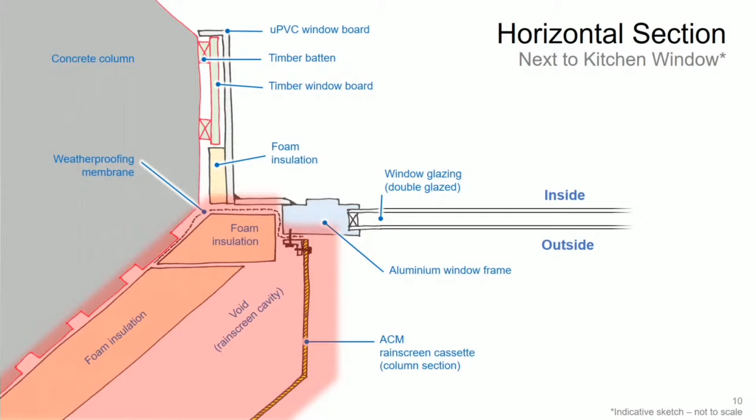In this case, the fire enters the cladding from the rear, but then finds a layer of polymer foam insulation facing a Reynobond PE ACM rain screen with a ventilated cavity in between them. I also developed a sketch through this horizontal section of the kitchen window of flat 16, highlighting this region of the external wall.

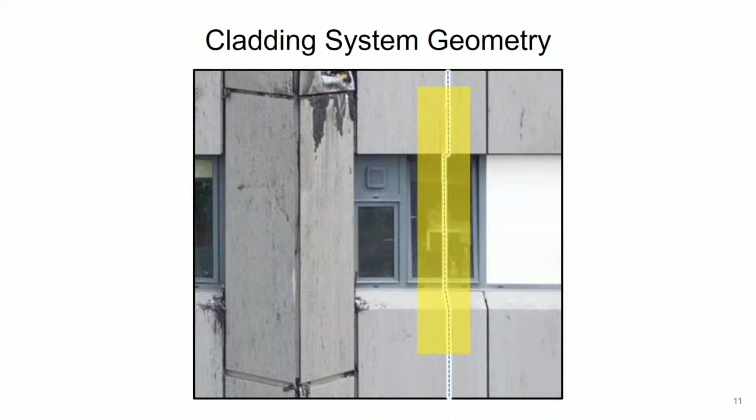Again, as the fire enters the cladding, it finds a layer of polymer foam insulation facing a Reynobond PE ACM rain screen with a ventilated cavity between them. At that time, I was unable to definitively say which of these was the dominant route for fire spread to the cladding. My opinion remains that some combination of these two fire spread routes caused the initial ignition that led to sustained burning and escalation of the cladding fire.

During my phase 1 work for the inquiry, I closely examined the materials and products within the external wall arrangement at Grenfell Tower. I concluded that the available evidence strongly supported a hypothesis that the presence of ACM panels with a polyethylene core material over large areas of the external surface of the tower was the primary cause of upward, downward, and horizontal fire spread.

I observed that the Reynobond PE incorporated a highly combustible polyethylene polymer which melts, drips, and flows whilst burning at elevated temperature. I stated that this polyethylene material should be expected to release large amounts of energy during combustion, to rapidly lose its mechanical properties on heating, and to cause separation of the ACM rain screen panels.

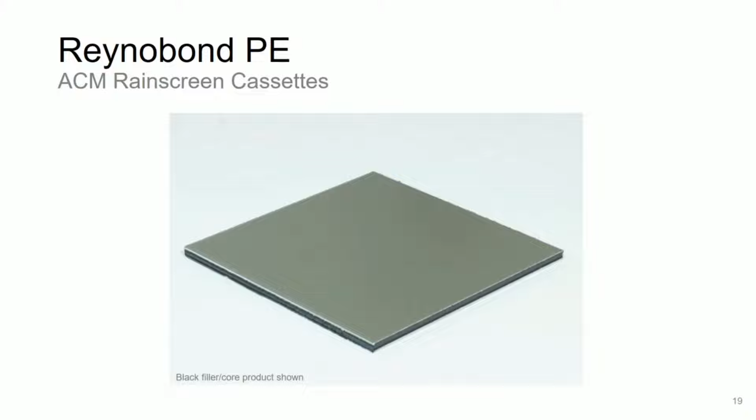Celotex RS5000 insulation board, shown here. I'll refer to this simply as RS5000 throughout this presentation. This product consists of a polyisocyanurate, or PIR, polymer foam core, faced on both sides with a thin, unperforated aluminium foil, which is only a fraction of a millimeter thick. I've performed experiments on both the 80 millimeter thick RS5080 product and the 100 millimeter thick RS5100 product.

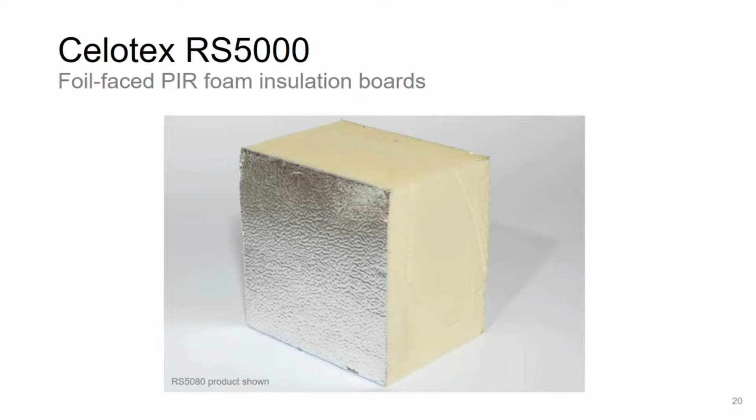Kingspan Kooltherm K15 insulation board, shown here. I will refer to this simply as K15 going forward. This product consists of a phenolic polymer foam core, faced on both sides with a thin aluminium foil, which again is only a fraction of a millimeter thick. The aluminium foil facer in this case has small perforations in it, which if you look very closely at this picture, you can see as small dots on the foil's surface.

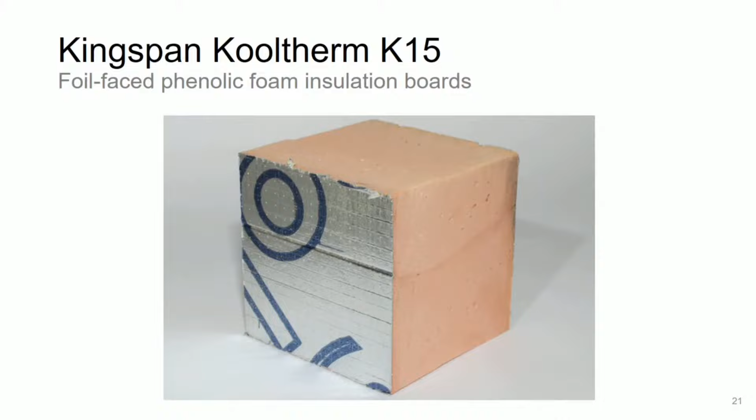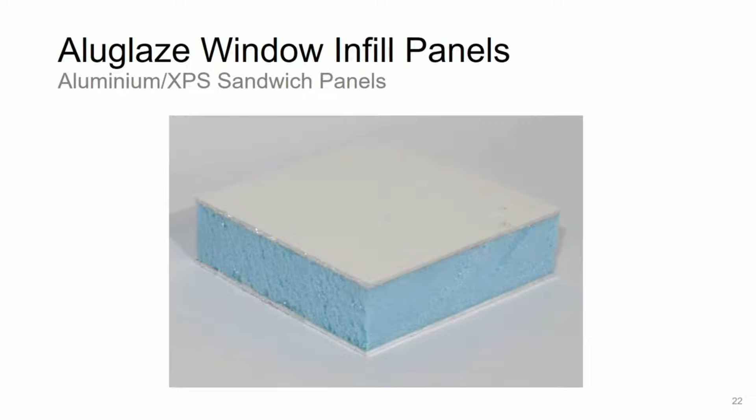And finally, Aluglaze window infill panels, shown here. This product consists of two flat aluminium sheets, each 1.5 millimeters thick, with an extruded polystyrene, or XPS, polymer foam core, which is 25 millimeters thick. So these are the four main products that made up the refurbishment cladding system at Grenfell Tower. Obviously there were other products involved, but these are the four main products that I've considered.

It's worth noting that PIR and phenolic foams are both thermosetting polymers, whereas polyethylene and XPS foam are both thermoplastic polymers. I've discussed those issues before, and I'll demonstrate the key differences between these two classes of polymers during my presentation today.

I've provided more detailed descriptions of all four of these products in my Phase 2 reports, so I'm going to avoid any further description here, as we've been talking about them for many years now.

In my first presentation to the inquiry, and indeed this morning, Professor Torero also covered a lot of this ground. I described some fundamental fire science concepts and terminology, including detailed discussions of pyrolysis, thermal inertia, flammability, ignition, heat of combustion, heat release rate, and flame spread. Those are all centrally important concepts, as Professor Torero illustrated this morning. I'm not going to rehearse those concepts again today, but the concepts I covered during my 2018 presentation are all immediately relevant to what I will present today.

I believe the most useful and illustrative way for me to present the outcomes of my experiments to individuals who are not fire safety specialists, and who may not have a deep technical understanding of all the terminology I've just listed, is by walking through videos of selected experiments and describing my observations as we go. I'll do quite a lot of that today, starting in a few minutes.

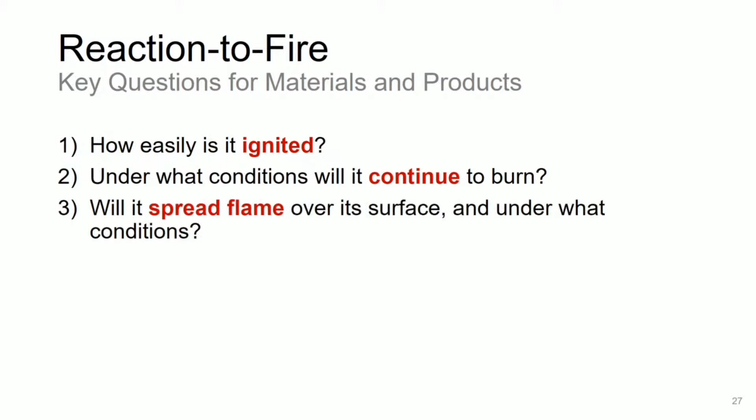When we think about the reaction to fire of a material or product, we need to consider a range of interrelated questions. How easily is it ignited? Under what conditions will it continue to burn once ignited? Will it spread flame over its surface, and under what conditions? How much energy, i.e. heat, is released when it burns under the conditions of interest? And at what rate is that energy released?

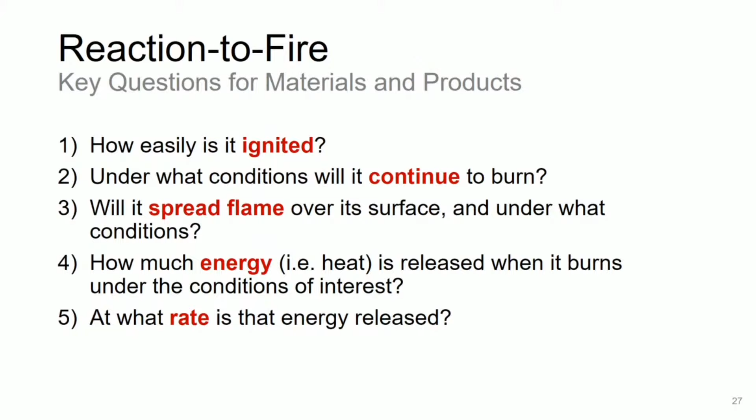Answers to any one of these questions in isolation cannot tell the whole story of the fire hazards presented by a material or product. This is why I routinely use the word hazardous as a catch-all term describing hazardous with respect to fire. None of the other descriptors - combustible, flammable, ignitable, etc. - adequately describe fire hazard on their own. This is also why my Work Package 1 report, and indeed my other experimental reports, contain results from a number of experiments conducted at various scales and under a wide range of heating conditions.

So first, I'd like to consider the heats of combustion of the polymer core materials from my four products of primary interest.

As I explained in my 2018 presentation to the inquiry, the heat of combustion of a material is a measure of the total energy that can be released per unit mass of the material when burning under optimal conditions for combustion. The heat of combustion thus provides an upper limit on the amount of energy that could be released by the burning of a material. You'll hopefully have noticed I'm using the word 'material' deliberately in this context rather than 'product'. Products do not have heats of combustion, unless a product is made entirely of one material. That's why I'm using that terminology - only materials have heats of combustion.

This slide shows a comparison of the heats of combustion measured for polymer core materials from each of the four products of interest. They were measured using a bomb calorimeter, and it's clear that the polyethylene core material from the Reynobond PE, the leftmost bar, has the highest heat of combustion, comparable to diesel fuel, as has been mentioned numerous times throughout the inquiry, and that the phenolic foam from the K15 product has the lowest of the products I'm showing here. However, it's important to recognize these values are given on a per unit mass of the core material basis, rather than a per unit area of the product that incorporates it.

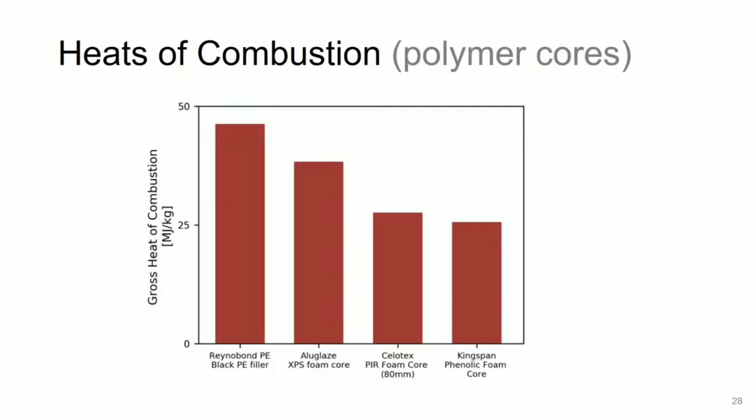If I multiply these heats of combustion by the densities of the respective core materials and then by the thicknesses of core material within each product, I get the maximum possible energy contribution per unit area of each product, which is actually a more useful metric - i.e. the maximum energy that could be released if the product were to burn under optimum conditions.

This comparison is shown here. We can see that on this basis, the story changes, because it's not simply a question of how much energy is in the material per unit mass, but also how much mass of material is present within the product. By this comparison, we can see that the maximum amount of available energy per unit area becomes more comparable between the Reynobond and the polymer foam insulations, and that the Aluglaze window infill panels appear to be less significant.

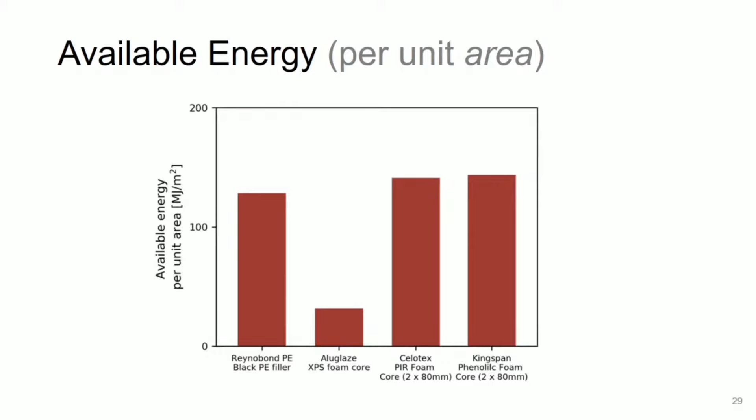But we then need to ask another question: how much of each product, in terms of square meters of surface area, was present on Grenfell Tower before the fire? Based on the design drawings for the external wall arrangements, I've calculated the total surface area of each product on a typical single story of Grenfell Tower, as shown by this highlighted area.

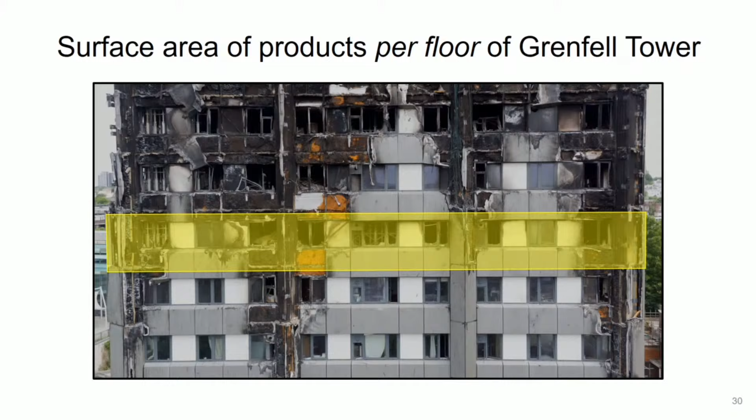We then end up with an approximation of the maximum possible energy contribution from each of the 4 main cladding products that were actually installed on Grenfell Tower. Here, I'm assuming as a worst case scenario that all 4 products burn entirely, and that this burning occurs under optimal conditions for combustion, which is actually not a fair comparison, I should say.

Here we can see the result of this calculation for a single story of Grenfell Tower, if we assume that only Celotex RS5000 insulation was present, i.e. there was no Kingspan present, and it was all the Celotex product. But we would see an almost identical story if we assume that only Kingspan K15 was present, and I've outlined that graph in my Work Package 1 report.

In any case, this plot shows that the maximum potential energy contribution from the Aluglaze window infill panels is small when compared with the Reynobond PE or the polymer foam insulations. And for this reason, I'll not discuss Aluglaze window infill panels much more within this presentation.

However, my Work Package 1 report does contain results of experiments on Aluglaze window infill panels, and I do consider that these are relevant to cladding fire safety issues, particularly for other buildings whose exterior walls and window sets may contain similarly hazardous products. Now, of course, the comparison in this plot is only fair if we assume that all of the energy available within each of these products is actually released during a fire.

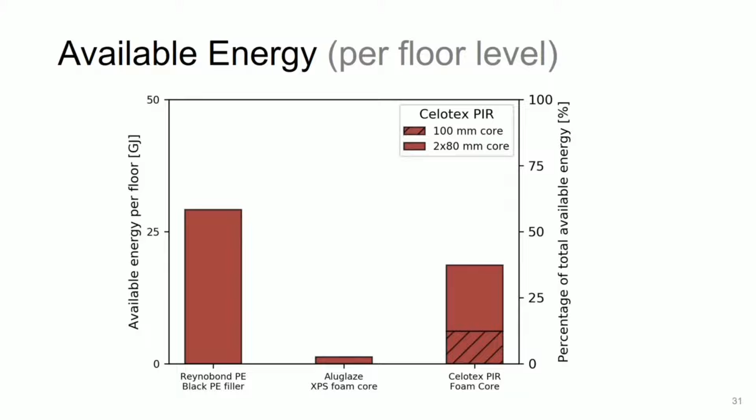And this is extremely unlikely in a real fire, both because the combustion environment in a real fire is not optimal, and because of the differing physical responses of the polymer core materials that are involved.

The thermoplastic core materials in Reynobond PE ACM and in Aluglaze window infill panels will melt and drip, whereas the thermosetting polymer core materials of RS5000 and K15 will char. They do not melt and drip. I'll show you how these differences affect the respective products' burning behaviors later on in this presentation.

In any case, the maximum potential energy contributions on their own don't provide any information regarding the rate at which energy would be released after a product is ignited, or indeed the total amount of energy that would actually be released in a real fire. Nor do the preceding comparisons account for the heat transfer processes that lead to ignition, the material geometry, or the physical changes that may occur, all of which will also affect a product's burning behavior.

To illustrate and understand these other factors, we have to perform other types of experiments.

For my Work Package 1 experiments, we designed and built a bespoke experimental apparatus. This was designed to investigate the mechanical behaviors of the products when subjected to a range of heating conditions, their characteristic burning behaviors, the impacts of sample scale and localized heating, the impacts of fixing and support conditions, and to establish the heat flux causing ignition of the various products of interest when tested under specific conditions of heating and fixing.

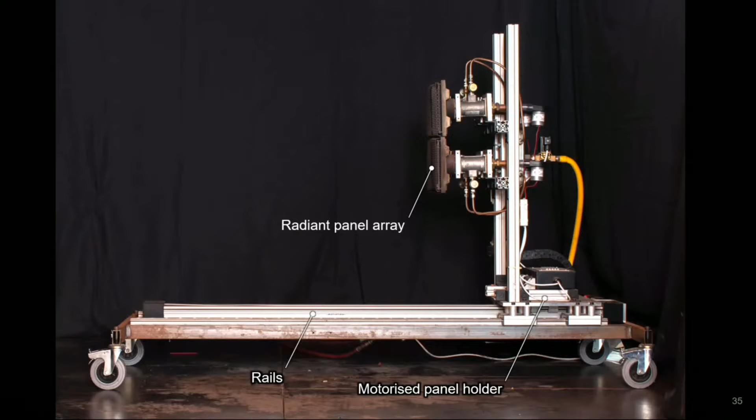Now, this photo shows the heater that we used in our experiments. It consists of an array of radiant panels that are fueled by a precisely controlled flow of propane gas mixed with air. The radiant panel array was mounted onto a motorized actuator, which allowed the distance between the panels and the samples to be varied, as I'll show you in a moment. So it moved in that direction.

This allowed us to control the severity of heating, which we call the heat flux, as Professor Torero explained this morning, measured in units of kilowatts per meter squared - units of energy per time per unit area. To give you a sense of scale, this rig that I'm showing here is about 1 meter tall.

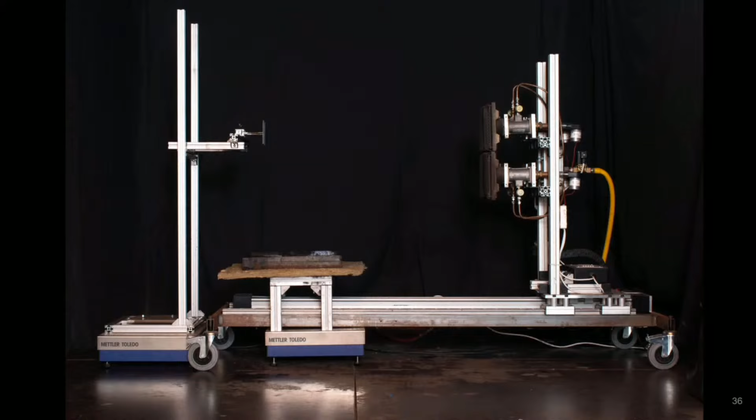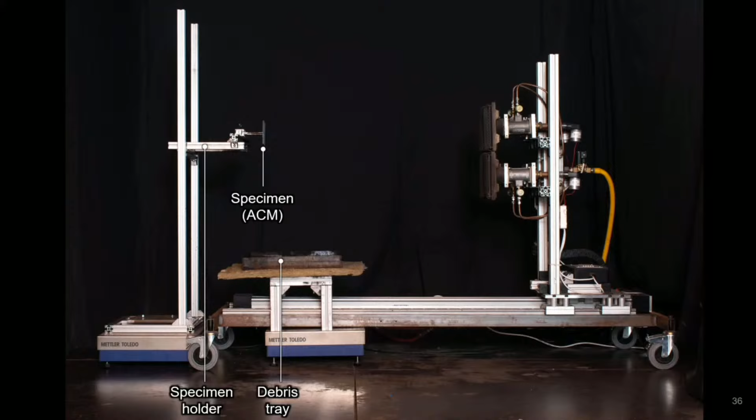Experimental specimens were mounted onto a specimen holder and held above a tray used to catch any falling debris. Both the specimen holder and the debris tray were placed on balances, essentially digital scales, to measure the masses lost or gained by the products throughout the experiment, or mass gained by the debris tray.

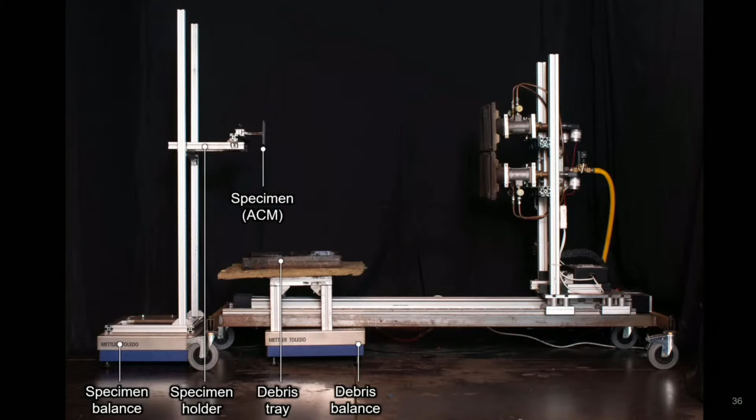The experimental arrangement also included other features aimed at improving consistency and repeatability of our experiments, including a pilot flame, a heat shield, and a movable heat flux gauge. These are all shown here and are described within my Work Package 1 report.

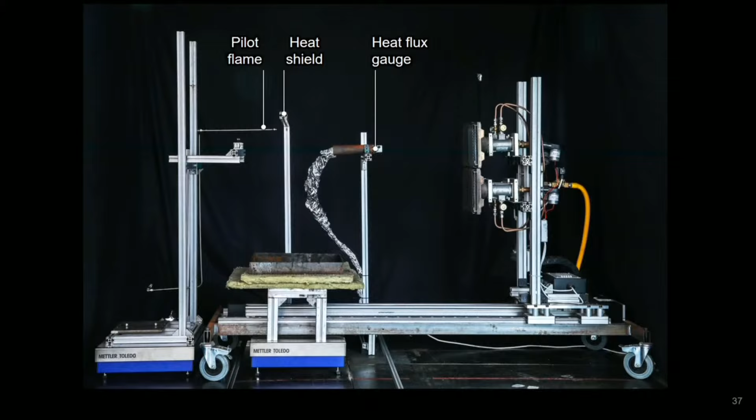The experimental specimens were square, flat samples of the respective products of interest with exposed edges of core materials, either 100 millimeter square or 500 millimeter square. Reynobond PE samples were tested in 3 different configurations, namely a rear fixing condition, with the sample supported from its rear aluminium skin, allowing for downward mobility of the front face of the sample on heating, as will become clear when I show you some of these experiments.

We also used a front fixing condition, with the sample supported from its front aluminium facer, thus allowing for downward mobility of the rear face of the sample on heating.

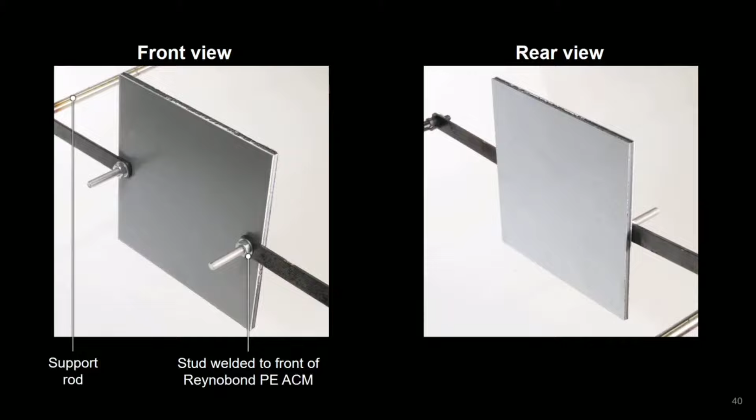Finally, a through fixing condition was also used, with the samples drilled through and supported from both their aluminium skins, the front face and the rear face, thus preventing downward mobility of either of the aluminium skins and also restricting to some extent their mechanical separation on heating.

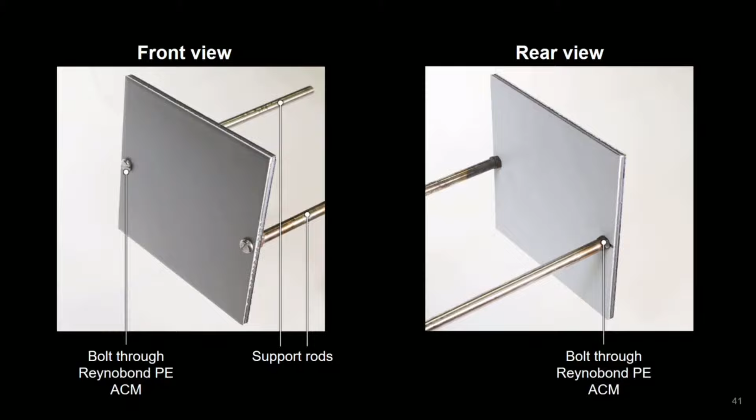These 3 fixing conditions were chosen to shed light on some of the observed differences in the performance of ACM products when exposed to fire in either riveted or cassette configurations, which I've discussed in detail in my Work Package 1 report. For instance, to better understand why ACM PE products tend to perform better in single burning item tests when tested in a riveted rather than a cassette configuration.

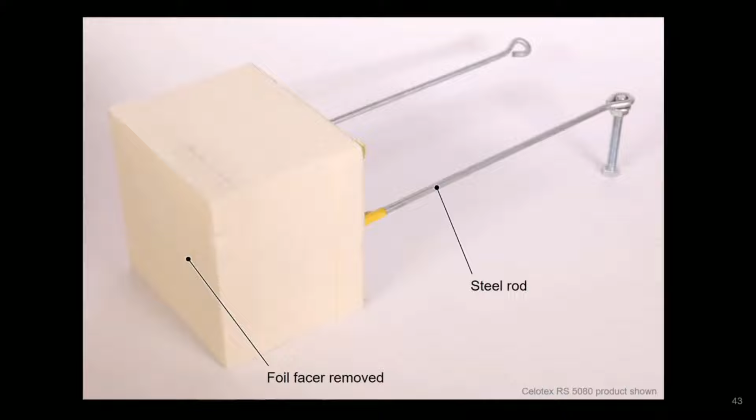Insulation product specimens in our experiments for Work Package 1 were held in place using 2 steel rods inserted into the rear face of the samples. In some cases, the foil facer on the exposed face of the sample was removed prior to the experiment. We did experiments both with and without foil.

This was done because during phase 1, I had identified locations within the cladding system where cut edges of insulation products were left exposed within cavities in the cladding system at Grenfell Tower.

A large number of measurements were recorded throughout these experiments. These included multiple videos framed from different vantage points, the masses of the specimen and any debris falling into the tray beneath the specimen, the heat release rate, or HRR as we refer to it, measured using a technique called oxygen consumption calorimetry, which I won't go into today, and temperatures recorded using thermocouples.

In a few minutes, I'll show you some videos of typical experiments performed using my Work Package 1 experimental apparatus, as I've described it here. I hope that when I show you these videos, this will all become a bit clearer, as I understand it's probably a bit difficult to get your head around what I'm talking about at the moment. So now let's turn to some of my main experimental results.

Before a product can burn with a flame, it needs to ignite. Ignition is simply the initiation of sustained flaming. Whether ignition of a solid material occurs depends both on the severity of heating, which we call the heat flux, and the duration of heating. In my 2018 presentation to the inquiry, I also explained that flame spread can be thought of as a series of ignitions.

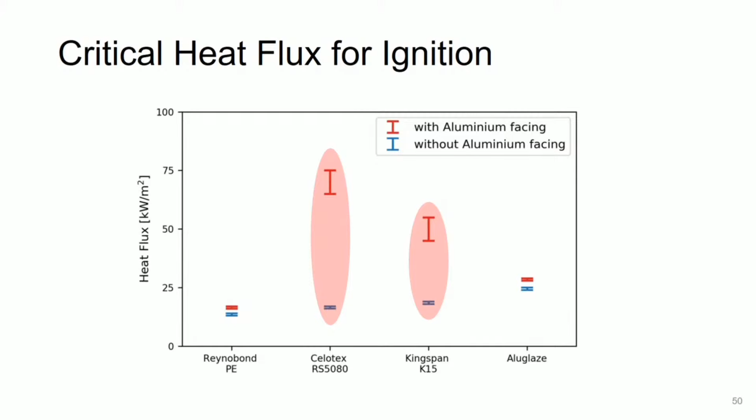Professor, I'm going to interrupt you for a second. I think the stenographer is finding it quite difficult to keep up with you, so if you could slow down a little bit, I think she'd find it easier. I will certainly try. Do you mind? I'm sorry, yes, apologies.

Okay, yes. So the beneficial effect of the foil facers is less pronounced for the Kingspan Cooltherm K15 insulation. I consider it likely that this is at least partly due to the presence of perforations in the K15 foil facers that are not present for the RS5080.

I should also say here that I consider that the presence of perforations in the foil facers of a polymer foam insulation should, self-evidently, be expected to influence -- by which I mean worsen -- its reaction to fire behavior.

I should also note that this plot fails to tell the whole story, because whilst it tells us what severity of heating will lead to piloted ignition eventually, it doesn't tell us how rapidly this ignition will occur at a given heat flux.

In general terms, all other factors being equal, it takes considerably longer to ignite the polyethylene core of an ACM product than it does to ignite the polymer foam insulation without a foil facer. We're talking minutes for the ACM versus seconds for the polymer foam insulation when we take the foil away.

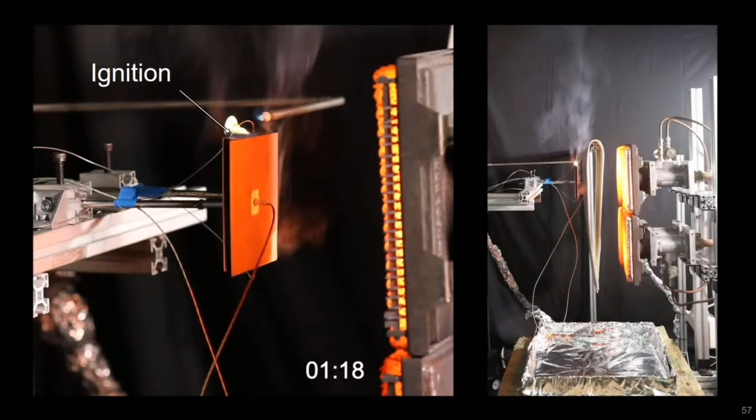At 1 minute and 18 seconds, we'll see ignition occur at the top of the sample. There it is. A few seconds later, at 1 minute and 22 seconds, the front facer of aluminium falls away from the sample and lands in the debris tray, and you can see that it's now flaming in the debris tray. The back face of the aluminium remains in place, held on the sample holder, and the majority of the polyethylene core material remains attached to that face of the sample.

Flaming then continues on the front aluminium facer, now in the debris tray, and discontinuous flames become visible over the front surface of the specimen. You can see here we've switched to a low exposure view on the left-hand side so that we can see things as the flames grow.

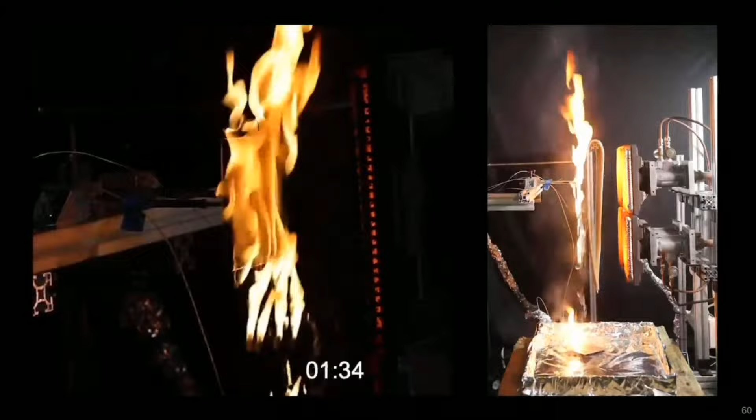By 1 minute and 30 seconds, flaming is well established over the front surface of the exposed polyethylene, and the first burning droplets of polyethylene begin to fall from the base of the specimen into the debris tray. The rate of droplet production increases quite rapidly, and a continuous stream of burning polyethylene falls into the debris tray and increases the size of the pool fire.

It's probably also worth having a look at the left-hand image, just the way the polyethylene is melting and flowing and dripping, which you can sort of make out through the flames.

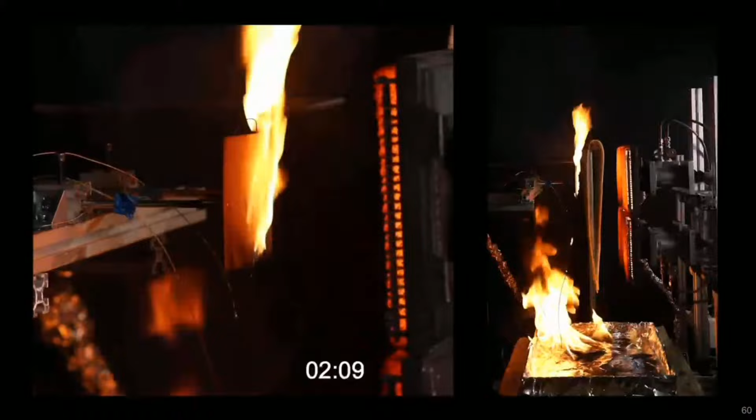At 2 minutes and 9 seconds, dripping ceases, and flaming on the specimen then also ceases shortly thereafter. Between 2 minutes 9 seconds and 4 minutes 48 seconds, we're running at 10 times speed. The length of the flames from the polyethylene, still burning in the debris tray, gradually decreases until extinction occurs. The experiment is then terminated.

I hope we can agree that looked like quite a lot of fire from actually quite a small piece of material. It's perhaps a bit tricky to visualize a 100 by 100 millimeter square sample of Reynobond PE, so I've brought a sample with me. To put it into perspective, this was the piece of Reynobond that we tested in that video, and that's about the size of a beer mat or a drinks coaster. So it's a piece like that - not very much material at all.

If you run the numbers, which I've done, you'd find that a typical single-story column cassette from Grenfell Tower, so a single panel of Reynobond PE taken from the tower from one of the column sections, would contain about 270 of these in a single column cassette.

Now let's take a look at some of the resulting data from this experiment. I'm going to focus on the data from this specific experiment and then provide you some general conclusions and data afterwards. I mentioned previously that during these experiments we measured the heat release rate due to burning. I don't want to intimidate anyone with over-technical language or data, but I do think it's important for transparency, if nothing else, for me to show you the kinds of data that I've considered in performing my analyses and drawing my conclusions.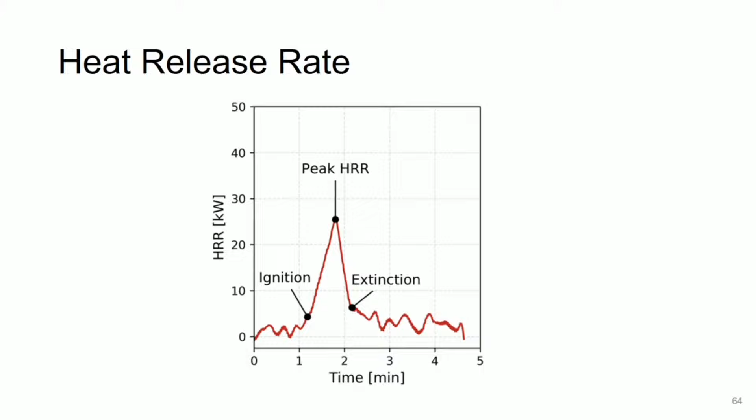If we calculate the area underneath this heat release rate curve, we can obtain an estimate of the total amount of energy that was liberated as that sample burned. Similar plots were developed and compared for all of the Work Package 1 experiments that we performed.

During our experiments, we also continuously monitored the amount of mass lost from the experimental sample and the amount of mass gained by the debris tray situated below the sample. These data are shown here, mass lost on the left-hand side and mass gained on the right-hand side. By comparing the mass of the sample with the visual observations, we observed a sudden decrease in the sample mass at 1 minute and 22 seconds, and this occurred when the front plate of aluminium fell from the specimen. The recorded decrease of sample mass corresponds with the expected mass of the aluminium facer plate.

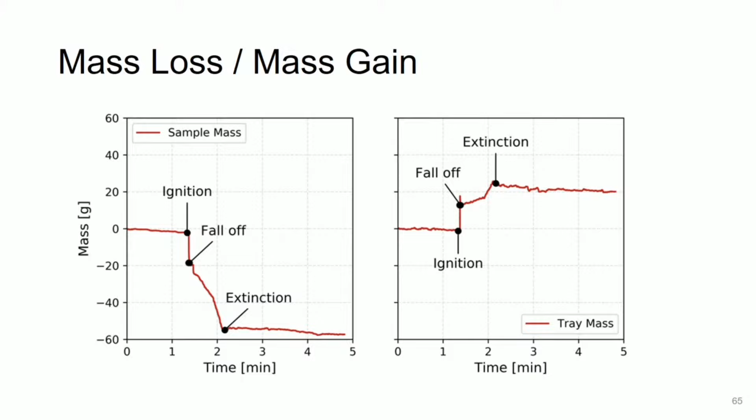There's a corresponding increase in the mass of the debris tray at the same moment, and a gradual sample mass loss follows the loss of the aluminium plate, associated with both burning and dripping of the polyethylene core material. During this period, the debris tray gains mass due to dripping. However, not all of the mass lost from the sample is gained by the debris tray, and clearly this is because some of the polyethylene has been consumed by burning before it reaches the debris tray. Similar plots, again, were developed and compared for all Work Package 1 experiments.

I don't have time to rehearse all of our results from all of our experiments, many dozens of experiments, so I'll simply summarize what I found in the next few moments.

Of the four cladding products considered in Work Package 1, Reynobond PE has the largest potential to contribute to fire growth and spread. It accounted for as much as 59% of the total potentially available energy on any single floor of Grenfell Tower, and as much as 87% within the architectural crown.

Of the four principal cladding products, Reynobond PE is comparatively slow to ignite. However, once ignited, it releases more energy more quickly than any of the other products. In my Work Package 1 report, I conclude that Reynobond PE was the largest contributor to energy release in the cladding at Grenfell Tower.

I found that the time to ignition of Reynobond PE is not strongly influenced by the manner in which the panels are fixed, i.e. riveted or routed in a cassette format. However, the subsequent rate of burning is likely to be influenced by the fixings, with riveted systems likely to perform better in general.

I also found that the balance between burning of the polyethylene core material in situ, at the location of the sample, and its mobilization downward by dripping whilst burning, is significantly influenced by the method of forming and fixing.

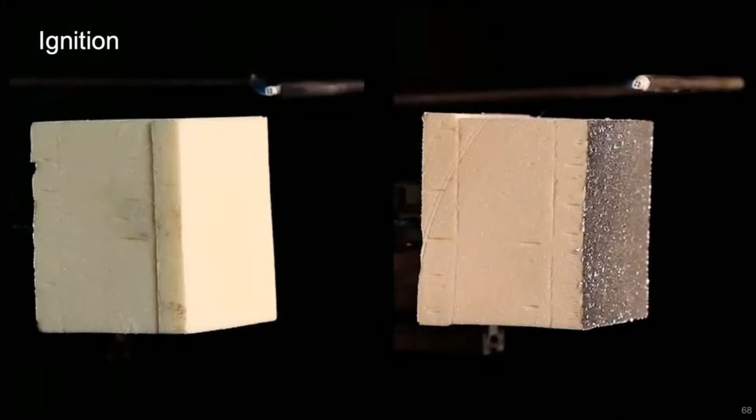This slide shows two different experiments on Celotex RS5000, the RS5080 product, both with and without the foil facer in place, obviously without the facer on the left. Again, the samples are being heated from the right-hand side, so the radiant panels are shining onto the rightmost face of these samples.

Before I press play, I'd like you to try and notice the speed with which the RS5000 insulation ignites when the foil facer isn't present—if you blink, you might miss it. After ignition, we'll see there's no obvious melting or dripping from the sample, which is why I'm not showing the debris tray in these experiments. Nothing falls down.

I'll explain now what we're going to see.

We will observe the formation of a layer of char over the surface of the sample on the left-hand side. This will result in a gradual reduction of the flow of flammable pyrolysis gases through the front face of the sample, and this will result in a reduction of the severity of burning, and eventually the flame will become intermittent on the surface and may even go out briefly.

We'll see the char will then crack, allowing flammable gases from deeper within the sample to exit the front face, and flaming will then persist for several minutes before again extinguishing.

On the right, with the foil facer present, we'll not see any ignition at all for the full duration of the experiment. I'd like to remind you that the foil facer on this product is only about 30 microns thick. That's 30 thousandths of a millimeter thick.

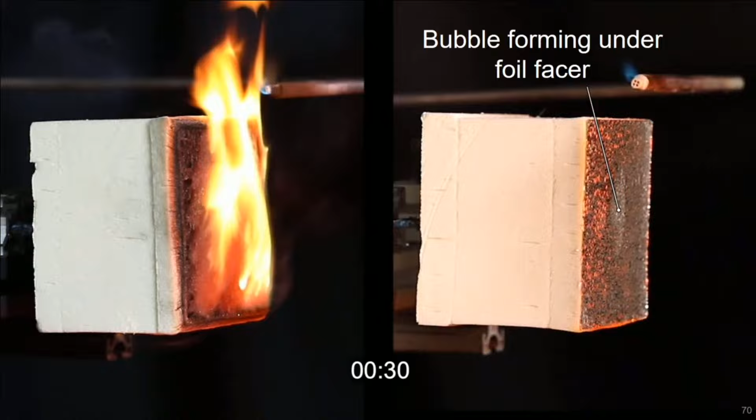On the left, we'll see the flaming reduce and become intermittent. So there we see the intermittent flaming, and this continues until the char cracks, at which point we see the flaming increase a little bit more.

So there you can start to see the formation of a crack in the front face of the char in the left-hand video. So there's cracks formed in the char surface, and flaming then persists for several minutes.

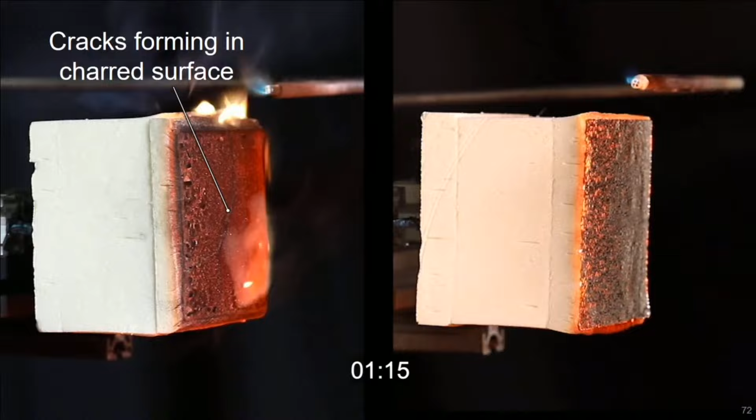Now I'm going to let the video run at 40 times the normal speed, because these are 20-minute long tests. And we can see that the sample, which is protected by a foil facer, doesn't ignite at all during the course of an otherwise identical experiment, whereas the unprotected sample is gradually consumed as it runs forward.

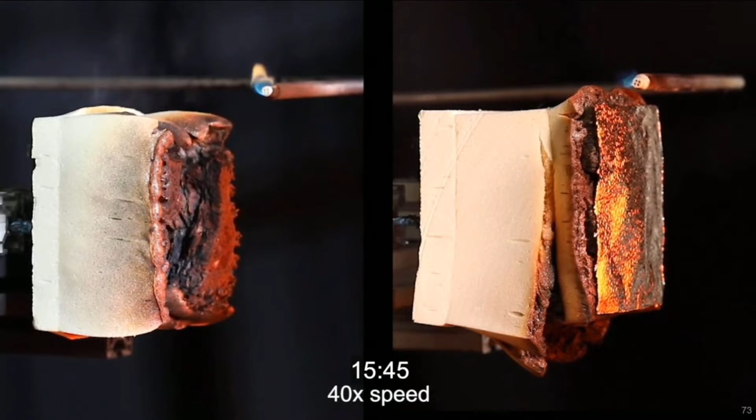So now I'll show you the same comparison for Kingspan Kooltherm K15 insulation, and you'll notice some differences in behavior. Again, a trigger warning.

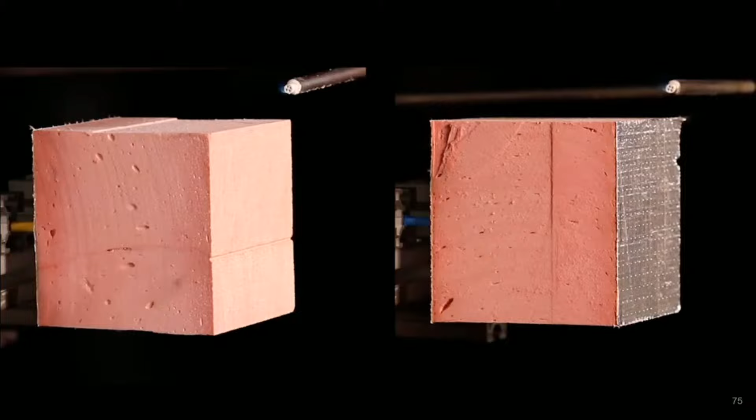I'll show two videos of experiments on Kingspan Kooltherm K15 insulation at the same heat flux, 50 kilowatts per square meter, both with and without the foil facer in place.

In this case, on the left, we will see that ignition doesn't occur as rapidly as was the case for the Celotex RS5000, taking about 16 seconds for the sample without a foil facer.

After ignition, we'll see that there is no obvious melting or dripping from the sample, as was the case for the RS5000. And again, this is because phenolic foam, like PIR foam, is a charring thermoset polymer.

We'll observe the formation of a char layer over the surface of the sample, which will again result in a reduction in the flow of flammable gases through the front face of the sample. This will again result in a reduction of the severity of burning, and eventually, in this case, extinguishment of the flame completely.

However, we'll then observe that the char will begin to glow, and that the sample will gradually be consumed by a combination of smoldering combustion and physical loss of material from the foam's surface.

On the right, for the sample which is protected by a foil facer, which in this case is only about 25 microns thick, so 25 1,000ths of a millimeter, again, we won't see any ignition.

We'll also notice that we won't see any bubbles forming in the foil facer for the K15 product. This is obviously because the foil facer is perforated, and the flammable gases can easily get out of the sample, so to speak. So now I'll let it run.

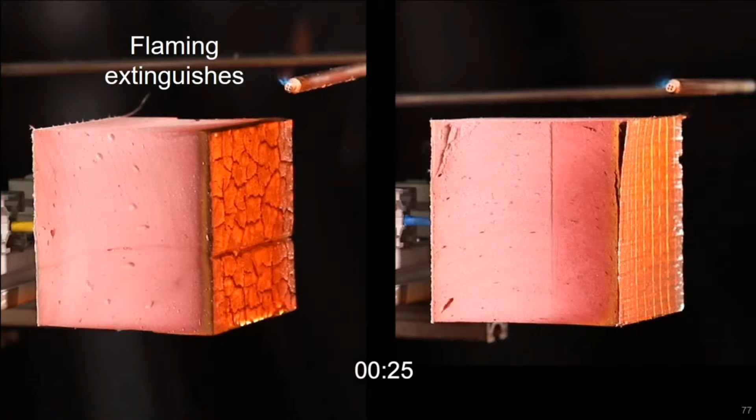So there we have ignition at about 16 seconds. Beyond ignition, there's no obvious melting or dripping from the sample, as I've mentioned. We can see the formation of a char layer over the surface of the sample and a reduction of flaming, quite rapidly in this case.

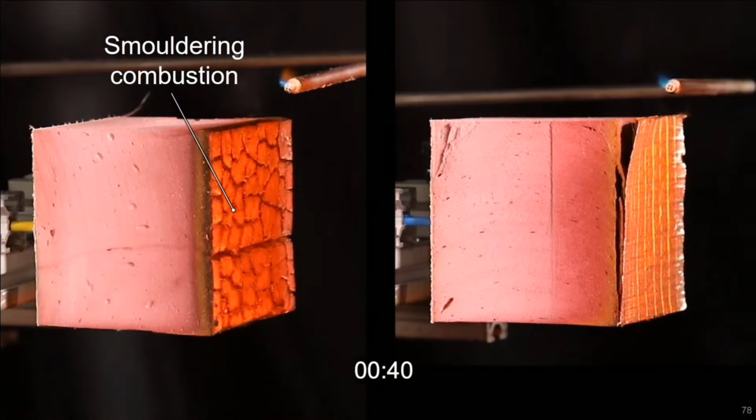The char then begins to glow, and the sample is gradually consumed by smoldering and a physical loss of material from the foam's surface. Once this has stopped, and I've pointed to the glowing, I'll let the experiment run at 40 times its normal speed. You'll remember that the RS5000 did not glow like this.

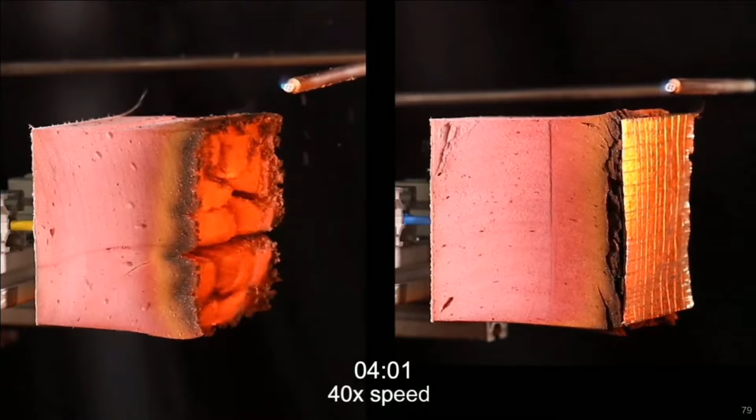The K15 sample, which is protected by a foil facer on the right, does not ignite. The sample without the foil is gradually consumed and continues to smolder throughout this experiment. This behavior was fairly typical for the Kingspan product.

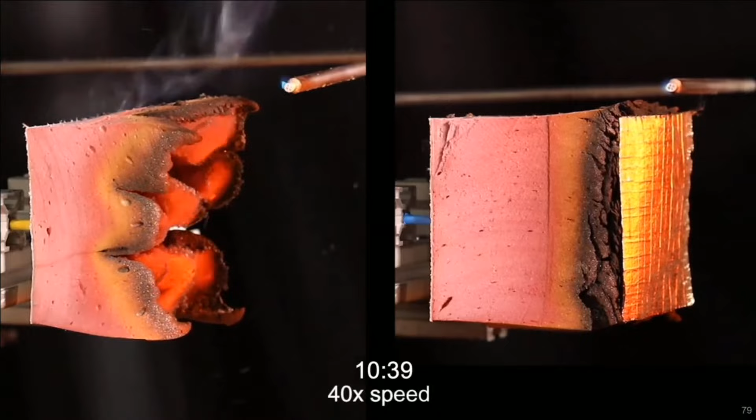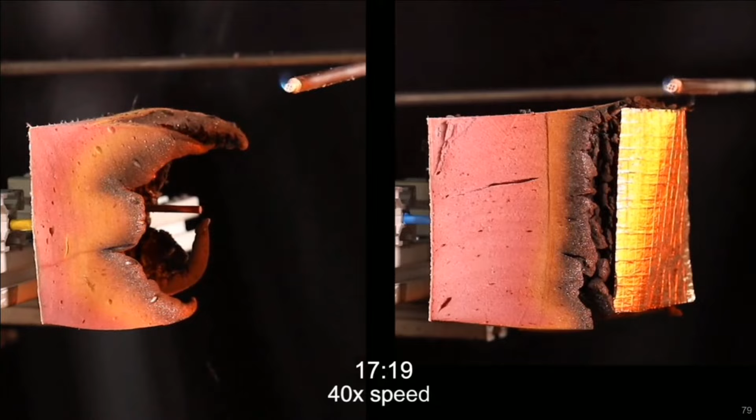Again, I don't have time to rehearse all of the results from my experiments on both of these materials here, so in a moment I'll just summarize what I've observed and concluded. You can see at the end of this experiment there was actually not that much material left on the left-hand side. Of course, we could quantify the amounts of material consumed because these samples are on scales, and we know how much mass is being lost throughout these experiments.

So now to some results. The PIR foam core of RS5000 and the phenolic foam core of K15 have lower heats of combustion than the polyethylene core from Reynobond PE. Of the four principal cladding products at Grenfell Tower, assuming that the vast majority of the insulation installed was RS5000 rather than K15, RS5000 would make the second highest contribution of available energy per floor.

I found that with their aluminium facers in place, RS5000 and K15 are both comparatively difficult to ignite. However, I found that when the foil facer was present on both products, Kingspan K15 was easier to ignite than the Celotex RS5000. As I've already noted, I consider that this is due to the presence of the perforations in the facer.

I found that without their foil facers, both insulation products are very easily ignited. This is a consequence of their very low thermal inertia, and indeed is precisely why these products are otherwise so very attractive for providing thermal insulation in buildings.

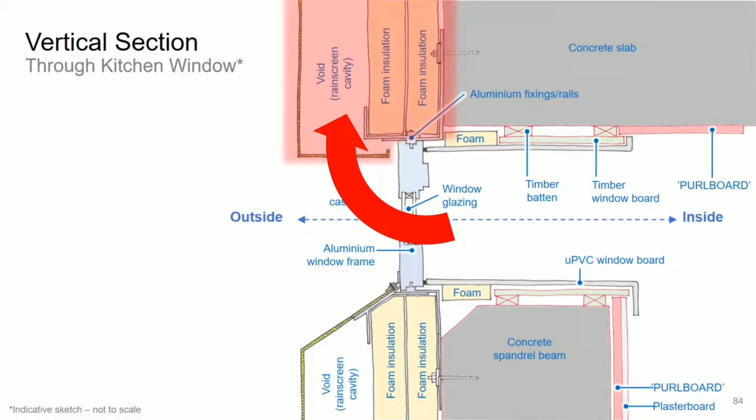My Work Package 2 experiments were focused on this type of ventilated cavity configuration of products. The time available to me won't allow me to cover all the material in my Work Package 2 report, so in the interests of time, I'll be blunt about the fundamental questions that I, working with my team at the University of Edinburgh, and in close consultation with Professor Torero, set out to answer in Work Package 2.

Did the Reynobond PE ACM burn so vigorously simply because of the presence of a cavity at Grenfell Tower? Or did it burn so vigorously because it was very well insulated by the other products at Grenfell Tower? Or did it burn so vigorously because of additional burning of the combustible Celotex or Kingspan insulation products at Grenfell Tower?

To try to provide answers to these questions, I needed to design another bespoke experimental apparatus. The apparatus had to deliver consistent and repeatable results, and allow systematic exploration of the relative contributions of the different products. The complexity and variety of real cladding geometry at Grenfell Tower would make systematic study of all possible permutations that existed on the building impractical. My objective was not to make a reconstruction of Grenfell Tower or to rate the products or systems, but to study the physics that might be relevant to fire spread at the tower. I wanted to understand rather than to rate or reconstruct, and it's very important that I make that distinction.

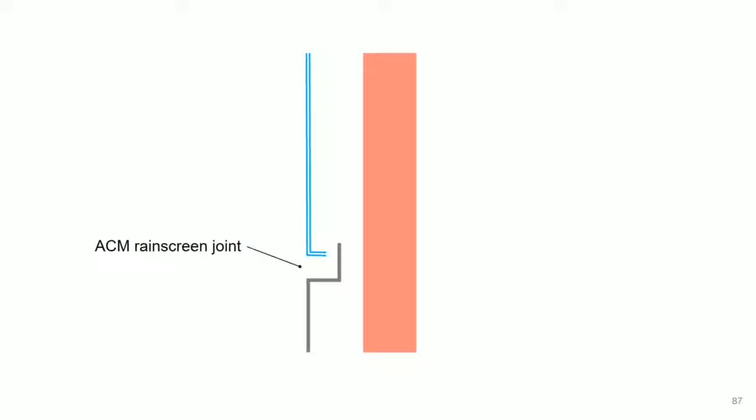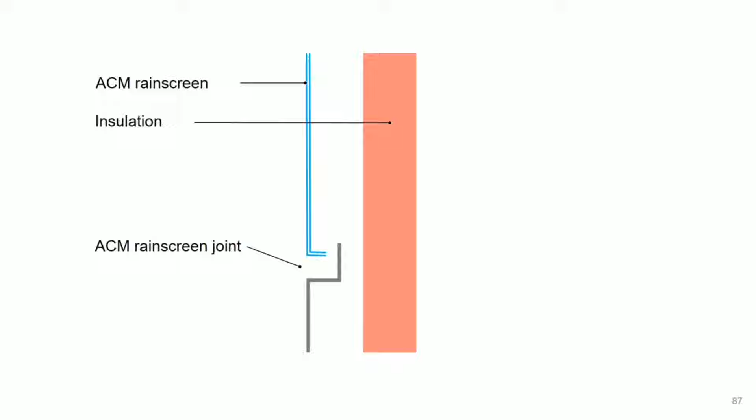We decided, therefore, to create an experimental apparatus that featured two parallel surfaces with a ventilated cavity in between them - parallel plates, if you will. We selected a geometry we felt was relevant, similar to the horizontal panel joint between rain screen cassettes of Reynobond PE on the columns at Grenfell Tower. However, again, I must stress this is not a reconstruction. On one side, I placed a panel of Reynobond PE ACM rain screen, and on the other side, I placed a panel typically of insulation.

I recognized, as I've already said, that melting, mobilization, and pooling of the polyethylene from the ACM rain screen would have a significant impact on fire development. I therefore knew that controlling the consistency of pooling of the polyethylene would be important in achieving the experimental repeatability essential if I wanted to isolate and study the influence of other experimental parameters.

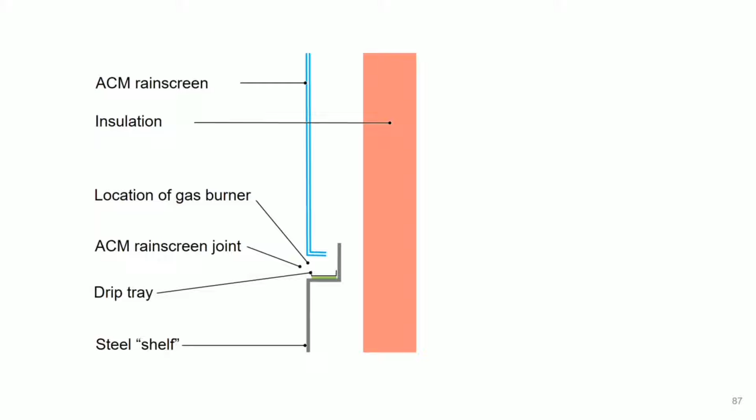So from the side, the overall setup looks like this, and I'll show you some photos in a moment that should make it clearer. From the front, which is perhaps even less clear as a drawing, it looked like this. You can see that the panel of ACM in these experiments was about half a meter wide, 500 millimeters, by about 1 meter tall, about half the size of me if I were to stand facing you.

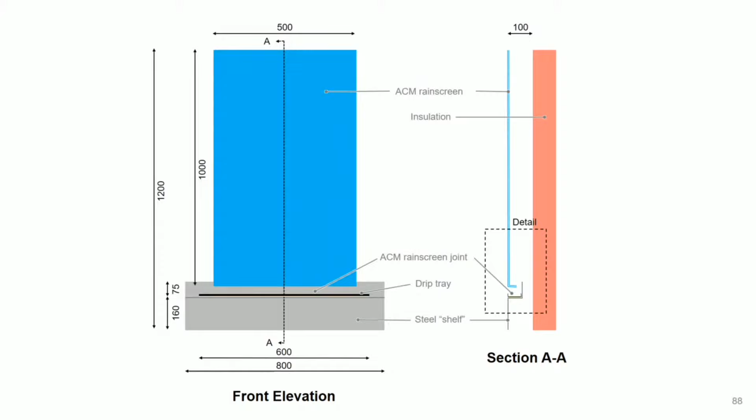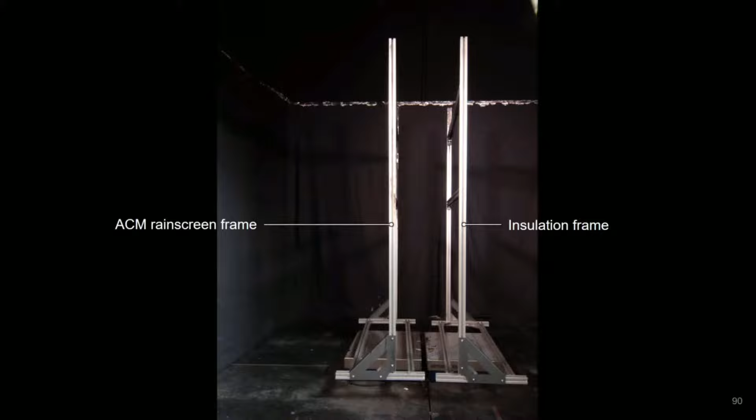The apparatus was assembled as follows, so I'll show you how it's built up. First, we have 2 load cells, which are very precise digital scales. We have aluminium frames that sit on top of the load cells, one to hold the ACM rain screen and one to hold the opposing face of the cavity, which was typically, but not always, a sheet of polymer foam insulation.

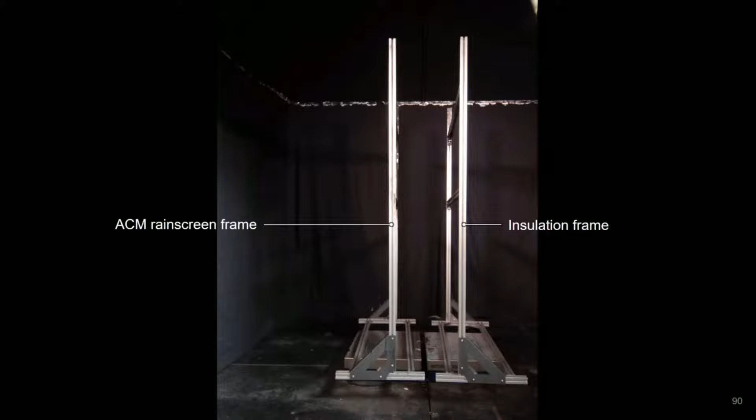2 more load cells sit above the initial 2 load cells so that I could weigh both the samples and any falling debris independently of one another as the experiments progressed. There are also metal trays to catch any debris, one for the ACM and another for the insulation or whatever was on the opposing face of the cavity.

The components of the specific experiment being performed, in this case, I'm showing a Reynobond PE ACM rain screen and an opposing face consisting of foil-faced Kingspan Kooltherm K15 insulation, and you can see there's a cavity between the two of about 100 millimeters in these experiments.

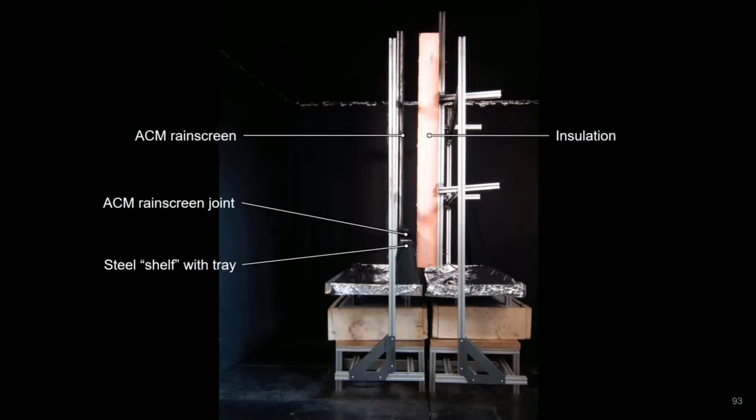A velocity probe measures the airflow velocity at the midpoint of the cavity, and a variable number of thermocouples measure temperatures at various locations on the ACM and within the insulation. Here you can also see the propane line burner on the left, mounted on a chassis that sits upon a slider so that I could move it into and out of the joint below the ACM. You'll see how this all plays out in a moment.

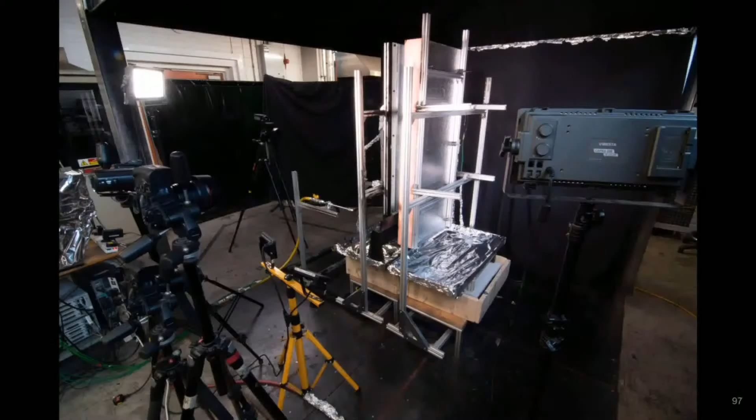Overall, the apparatus looked something like this. Here you can see that we also used a large number of cameras to capture simultaneous videos from various vantage points during the experiments, and I'll show you some of these videos in a moment.

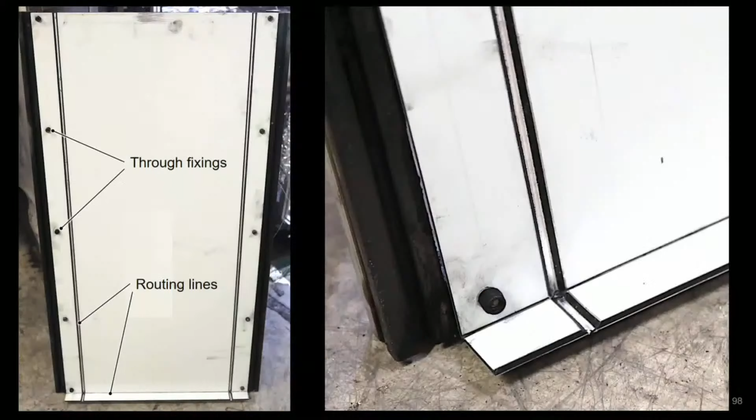Before I do that, however, I just want to show you how we cut and formed the Reynobond PE panels for our experiments, because this is actually very important.

This slide shows the rear face of a Reynobond PE ACM panel mounted on its aluminum supporting frame before an experiment was conducted. You can see that we have cut the edges of the panel and left the black polyethylene core exposed along the panel edges.

You can also see that we have routed the surface of the panel that faces into the cavity. So you're looking at the surface of the ACM that would face into the cavity, looking at the opposing face. We've done this so as to fold it to create the horizontal ledge that you can see at its base.

We've also routed vertical lines down the sides of the ACM panels so as to create free-floating plates of aluminium which are attached to the sample only via the ACM's polyethylene core. Otherwise, the bolts that you can see down the side of the sample would have held that inside face in place. This is akin to the condition that would exist on the inside face of an ACM rain screen cassette, such as those used at Grenfell Tower.

Rather than explain every experiment in detail, I'll show you just one example experiment, and then focus the rest of my presentation on what I've found and concluded. I've made videos of all of my experiments available via the inquiry, and have also produced a number of composite comparative videos that are available within and referenced in my Work Package 2 report.

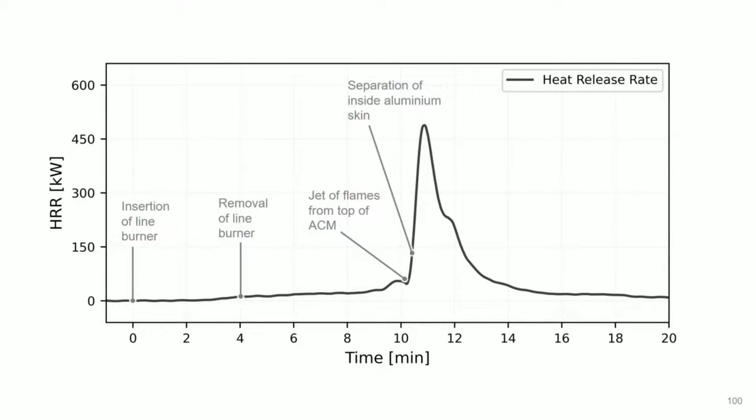The fire will then steadily grow during the course of about 6 minutes, and we'll observe a jet of flames from the top of the Reynobond PE rain screen from about 10 minutes into this particular experiment. Shortly after this, if we look very closely, we'll observe separation of the inside aluminium skin of the Reynobond PE, resulting in a very rapid and violent escalation of burning. This is what I refer to as escalation to full involvement of the ACM in my Work Package 2 report.

It then increases to a peak heat release rate value. The polyethylene from the Reynobond PE gradually burns away over the course of a few minutes, and the foil-faced Kingspan Kooltherm K15 continues to smolder and flame, in this case until the experiment is terminated after 20 minutes.

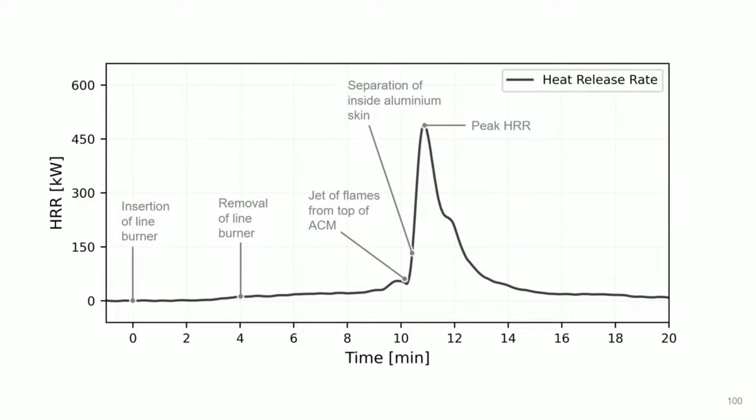Again, a trigger warning is warranted here. This video I personally find particularly shocking.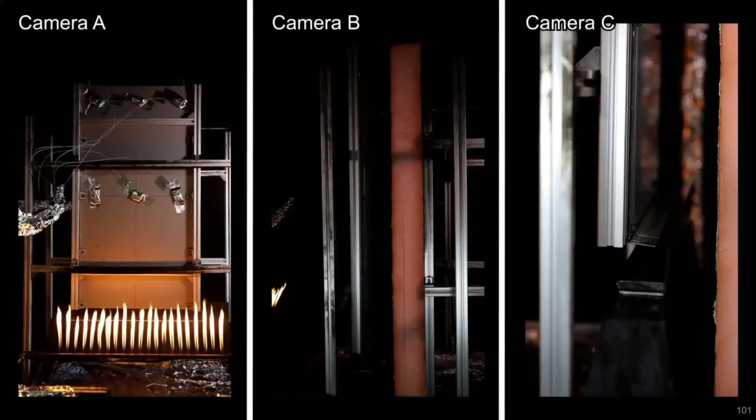Okay, so this image shows 3 different views of our experimental arrangement. Camera A is from the front - you're basically looking at the outside face of the Reynobond PE. This would be equivalent to standing outside the building and looking at its external surface. You can see the propane line burner in the foreground, in its standby position here. It has not yet been inserted into the rain screen panel joint in the test assembly.

Camera B, which is a bit dark in this view, shows the apparatus from the side. You can see the cut edge of the pink K15 insulation at the right-hand side of the camera B view. Camera C, also from the side, is a close-up of the location where the burner is inserted into the panel joint. Again, you can see the insulation on the right-hand side, and if you look closely, the foil facer is still there in this case.

The experiments commence when the line burner moves into the ACM rain screen joint. The burner is then held in place for 4 minutes before being removed, allowing the fire to progress, or not, under its own steam. I'll now talk through the video of this particular experiment and highlight, as I've been doing previously for the other videos, the various points of interest. The experiment begins by moving the burner into the joint in the ACM.

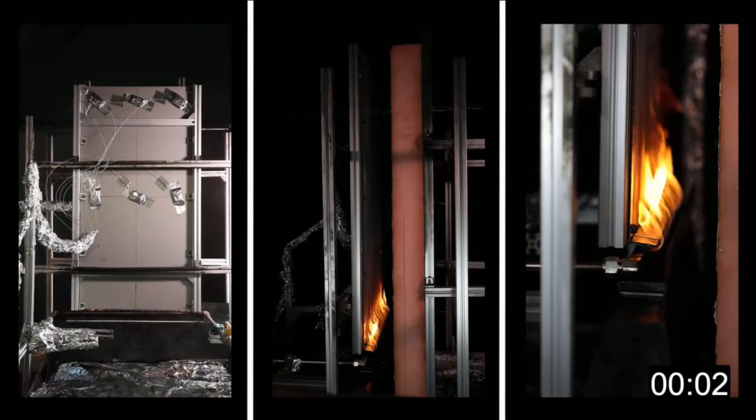You can see that when the burner is moved into the joint, the flame is drawn into the cavity and begins to interact with the ACM.

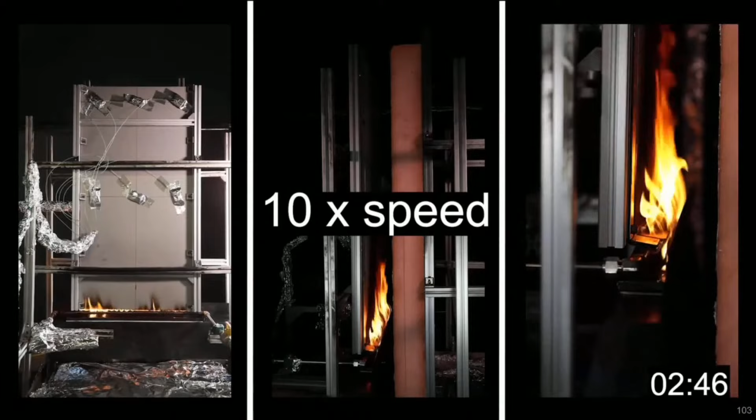Again, I'm showing this at 10 times speed. It takes around 1 minute and 30 seconds of heating before the polyethylene starts to drip out of the ACM and into the tray below. You can view that particularly in the leftmost view here. For about 90 seconds, the rate of dripping increases.

Now, it's quite hard to see in this next video, but at 3 minutes and 12 seconds, there's a free-floating aluminium plate on the upper side of the aluminium ledge at the base of the ACM, and it drops into the drip tray. It's going to be in this view over here.

If you remember back to the photo I showed of the routing of the aluminium composite material, the aluminium plate along the top of that shelf is essentially free-floating on a layer of polyethylene, and when that polyethylene melts, the plate drops off. We've intentionally angled that shelf down at 5 degrees because we found we needed to do that to ensure consistency amongst the tests. We tried to make it so that plate would consistently fall off, which gives you a sense of the complexity of the response of these systems.

So just there, the plate dropped off. Up to about 4 minutes, a pool fire of burning polyethylene continues to grow within the drip tray. The flames extend to about three-quarters of the cavity height by about 4 minutes. Remember, this entire rig is about 1 meter high, that sheet of ACM PE.

At 4 minutes, the line burner is removed. After 4 minutes, the flame height within the cavity continues to increase gradually as more molten PE mobilizes and exits the ACM panel. At about 5 minutes and 19 seconds, the flames become visible above the experimental apparatus, particularly in the leftmost view.

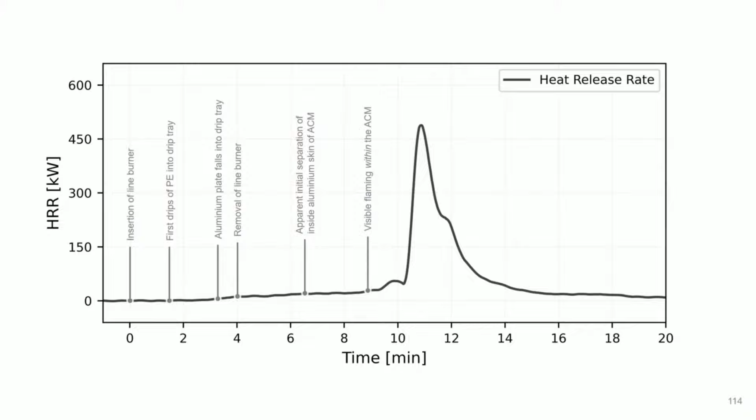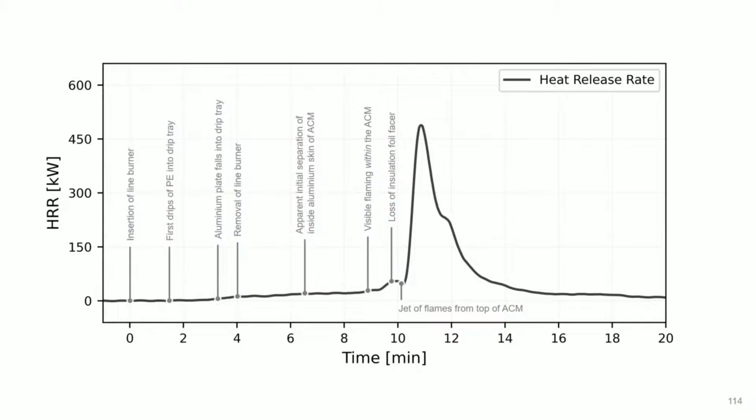We then see visible flaming within the ACM, between the two aluminium skins near its base. We see loss of the insulation foil facer just prior to escalation, then a jet of flames coming out of the top of the ACM, from between the two aluminium plates, with separation of the inside aluminium skin, a very rapid and violent escalation up to peak heat release rate, and then a slow decay over a few minutes until the PE stops burning. We finish the test after 20 minutes.

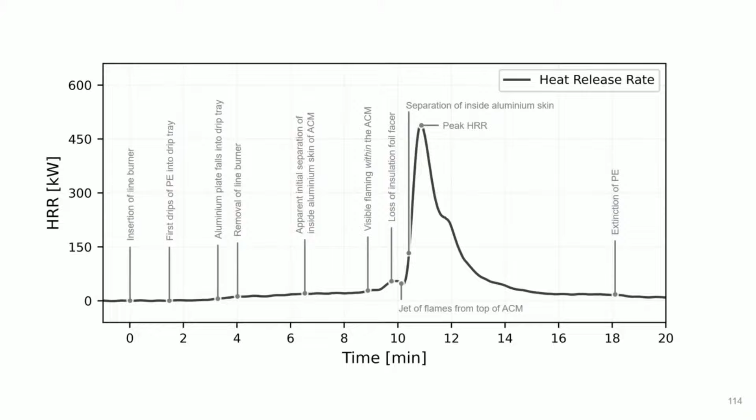Now, as I've said, I don't have time to go through all of our experiments. That just gives you a flavor of the kind of things we observed and the way we tried to go through each experiment very carefully, to pick out why we had observed what we observed, to understand the physical underpinning mechanisms for what we were seeing in our data, which is really important—going through the heat release rate curves, looking at changes in behavior, going back to the videos, and trying to articulate in physical or heat transfer terms why what we were observing was happening.

In the end, we undertook 37 experiments on this overall general arrangement, varying parameters of interest, so as to try to answer the three questions I posed near the beginning of this section. I'll now take you through my findings. For transparency, the order in which I'm presenting them is not the order in which we performed the experiments—I'm presenting results in the order I believe will be easiest to explain and understand.

So just to remind you, my key questions were: was it the cavity, i.e. the fact that we had the geometry of a cavity? Was it the insulation, i.e. the fact that the opposing face of the cavity was insulating, keeping energy within the cavity? Or was it the combustibility of the insulation, the fact that the opposing face of the cavity could burn, thus contributing more energy to the system?

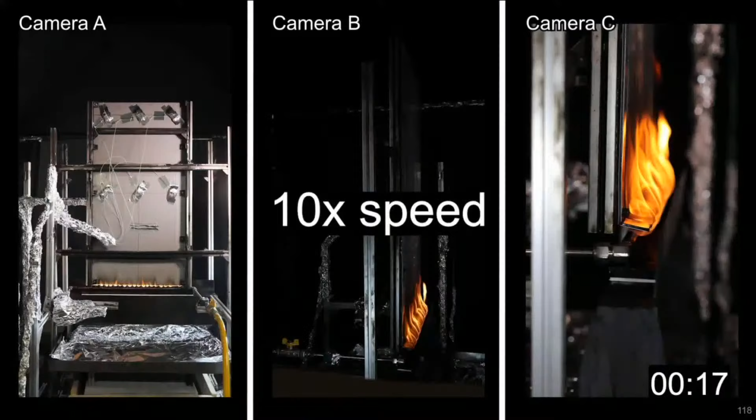I'm just going to show this at 10 times speed in the interest of time. You can see the burner gets inserted. After about 1.5 minutes, you see dripping. We see the aluminium plate fall off the little shelf on the ACM PE. We'll see the line burner removed at 4 minutes, and eventually this experiment goes out. So we do not observe escalation to full involvement of the ACM in this case.

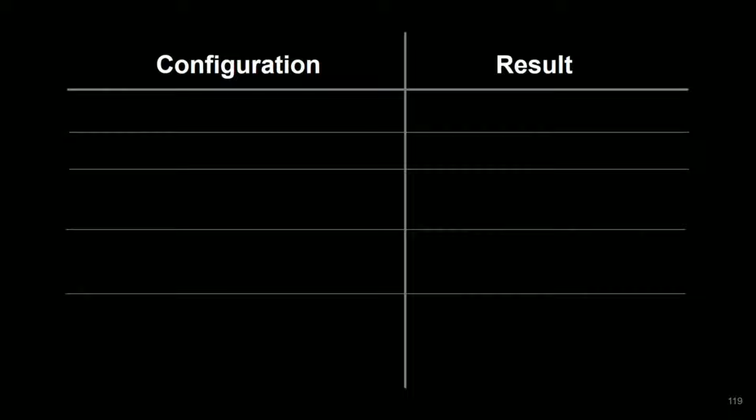Eventually what you'd see is that the small polyethylene pool fire gradually just burns itself out—you'll have to, perhaps in the interest of time, take my word for it. So this experiment with no cavity showed that if no insulation products were present to form the geometry of a cavity, then escalation did not occur.

However, I was uncertain whether this was because the geometry of the cavity was absent, or because the product from which I had formed a cavity—for example, the K15 insulation board in experiment 21 that I showed you—was highly insulating, or because it was combustible.

To answer this question, we created a non-insulating cavity using Renabond PE on one side and a continuously water-cooled steel plate on the other—essentially a steel plate with a cascade of water running down its rear surface. The steel plate stayed at low temperature throughout the experiment and actually represented a heat sink removing energy from the system. So it creates the geometry of a ventilated rain screen cladding system, but without insulating it at all—in fact, taking energy away from it.

Again, we found that escalation didn't occur. This meant that the presence of the cavity alone was not sufficient to cause escalation using our specific experimental configuration and procedure. I consider this a really interesting result—the geometry of the cavity and the resulting flow conditions within the void by themselves did not lead to escalation of burning of the Renabond PE.

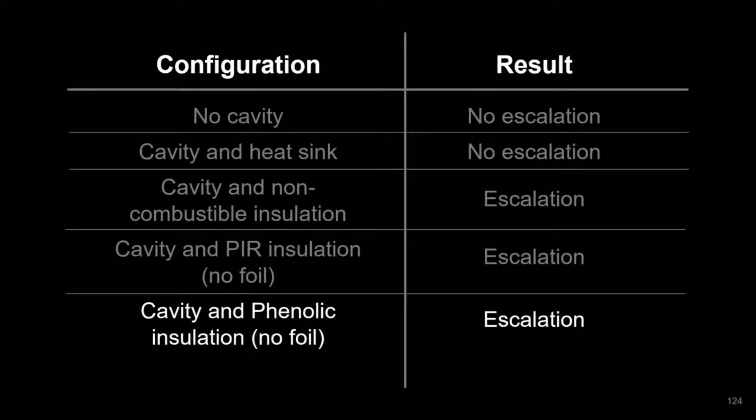I then undertook similar experiments, this time with Kingspan's K15 phenolic foam insulation product. Again, I removed the foil facing from the insulation, and again I found that the results were very similar to the case of PIR with no foil facer. Escalation occurred, and again it occurred more quickly than for the non-combustible insulation case. I observed that the K15 continued to smolder for some time after escalation, and in some cases continued flaming for quite some time. The Celotex PIR foam did not display this behavior.

The fact that these polymer foam insulating products were combustible thus appeared to be of relatively little importance, compared to the fact that all of these insulation products, whether combustible or not, were very effective at retaining heat within the cladding system. The insulating nature of these products, rather than necessarily their combustibility, resulted in more rapid and widespread heating of the Reynobond PE, more rapid mobilization of a larger volume of polyethylene core material, more rapid separation of the inside aluminium skin over a larger area, and therefore more rapid escalation to full involvement of the Reynobond PE in the fire. The fact that the polymer foam insulation products could burn appeared to be of secondary importance, as compared to their insulative properties.

At this point, I'd like to return again to the original questions that I posed at the beginning of this presentation. Did the Reynobond PE ACM burn so vigorously because of the presence of a cavity at Grenfell Tower? Based on these experiments, I would suggest that the answer to this question is no. The cavity by itself did not cause the Reynobond PE to burn so vigorously.

Did the Reynobond PE burn so vigorously because it was very well insulated by the other products at Grenfell Tower? Based on these experiments, I would suggest that the answer to this question is yes.

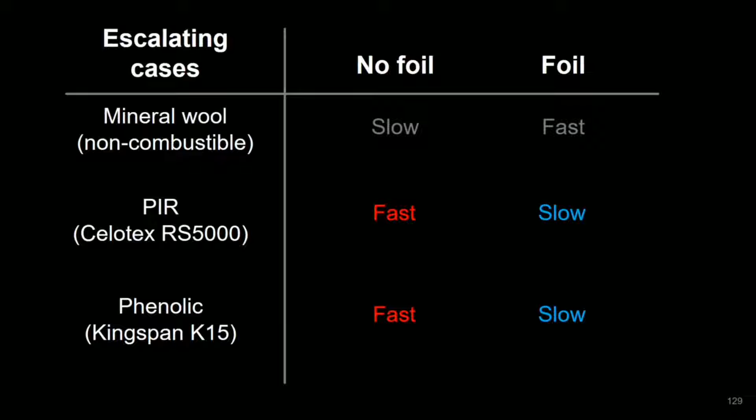I consider this to be a useful summary slide in some respects that gives an overview of the differences between the various configurations I've investigated in my Phase 2 Work Package 2 experiments.

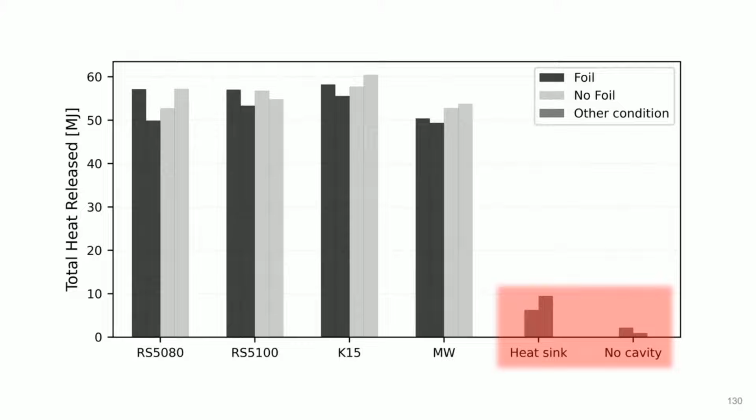Finally, in cases where there was no escalation, i.e. where the cavity was not insulated at all, or there was no cavity at all, the total heat released was very small, albeit there does appear to be a small influence from the presence of the cavity. The experiments that had cavities, if you watch the videos, you'll see that the pool fire is larger and burns for longer in those cases, hence a slightly higher heat release.

Now this brings me to the end of my main comments on my work package 2 experiments. There were other experiments and other questions, but I'll not rehearse these today as they're documented in great detail in my work package 2 report. Instead, I'll simply emphasize my conclusions.

In all of my evidence to the inquiry to date, I have consistently identified Reynobond PE as the primary cause of rapid fire growth and spread during the Grenfell Tower fire. My experiments have allowed me to quantify the relative contributions of the main cladding products to the rate and extent of fire growth and spread.

My experiments have highlighted the immense complexity of the heat transfer environment within a ventilated rain screen cladding system, even for the relatively small and simple cladding system arrangements that I've tested. This suggests, to me, that an intuitive understanding of the factors that govern fire initiation, growth, and spread in such systems can very easily lead to incorrect assumptions, as Professor Torero intimated as well this morning.

It remains my view that of the products and materials present in the external wall assembly of Grenfell Tower, the Reynobond PE was primarily responsible for the rate and extent of fire spread.

With respect to the role of the insulation products, I have found that it was primarily the thermal properties of the insulation products which caused the Reynobond PE to burn so vigorously. The fact that these products are exceptionally good insulators made matters much worse for the combustible rain screen that was used.